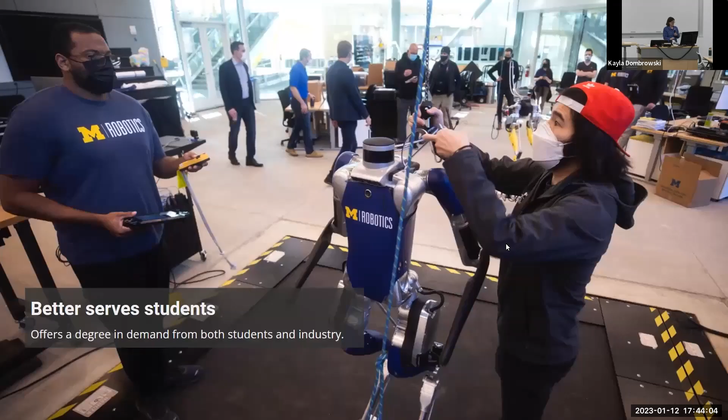We think that a robotics undergraduate program is the right way to get undergraduate students into robotics. If you'd asked people five years ago what's the best way to be a roboticist from an undergraduate perspective, they might have told you to quadruple major in mechanical, electrical, computer science, and mathematics, and while you're at it, minor in psychology. Now, we are not going to put you through that many classes, but we're going to take the pieces of all those majors that relate to robotics and put them together into an undergraduate program to get you ready for careers in robotics or for graduate school in robotics.

When we started the robotics graduate program and the institute, we were working with voluntary service from the faculty. The faculty didn't belong to the Robotics Institute—they belonged to mechanical engineering, electrical engineering, computer science, etc. Now that they've moved to the robotics department, offering robotics courses is their full-time job, not something they're doing on top of other things. Serving on the robotics undergraduate committee is their full-time job, not their part-time job. We think it's better for the faculty to really be engaged in the department, and this will give us the opportunity to ramp up our courses much faster than we could without that department structure.

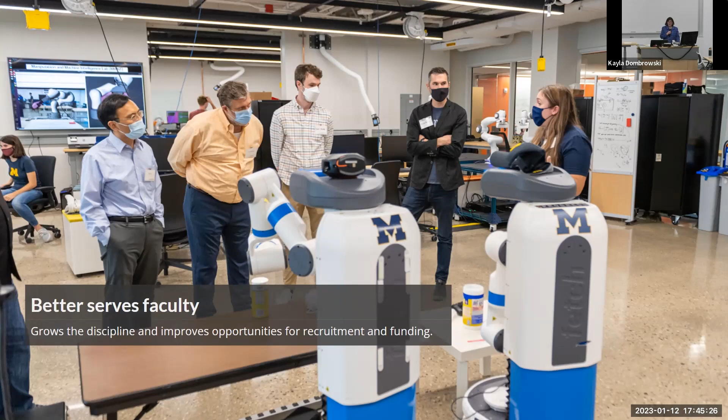You'll hear a lot more about how we're innovating in our undergraduate program. The first thing is we turned the curriculum upside down, and we have you start with linear algebra instead of calculus. We've been co-teaching that course with other schools around the country, including some that are historically Black colleges and universities, creating an environment for our undergraduates built on partnership and collaboration.

We want to infuse those values of diversity, equity, and inclusion throughout our department in the undergraduate and graduate program. We want you to work together with other students, with help from the graduate students, the instructional aides, and the faculty, so that everyone can be successful. All the students admitted to Michigan are super smart and inherently capable of succeeding. We are not building any kind of weed-out program—we are building a collaborative success program.

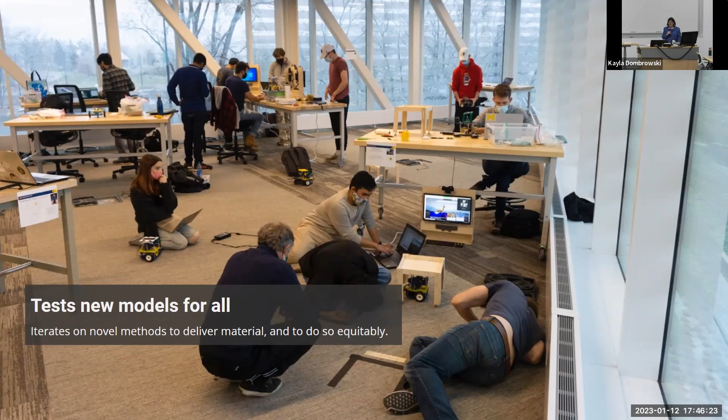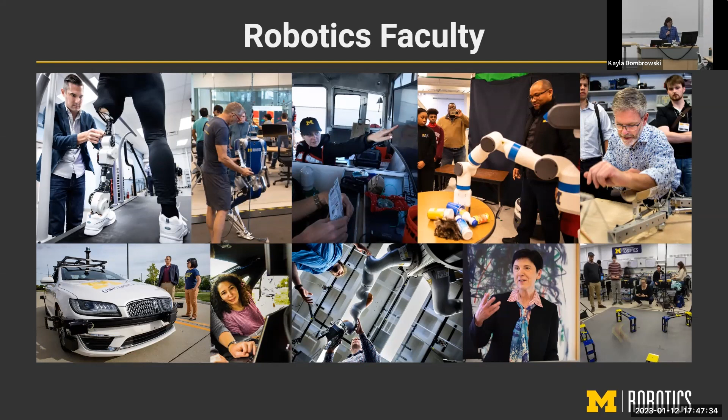I mentioned we'd like to try to define the discipline of robotics. So this is our definition that we're working from: the study of embodied intelligence. That body is really important—this is not just artificial intelligence. This is artificial intelligence embedded in a physical system that can sense its environment and interact with its environment, including people. Even autonomous vehicles need to be given directions and goals from people. They don't do their own thing, at least not yet.

We also have a set of values in the department that I hope you will all embrace. The first is robotics with respect. We expect all members of the department to treat everybody with the utmost respect—other students, teammates, teaching staff, technical staff, cleaning staff, random visitors to the department. We get a lot of those—everybody.

The second is enthusiastic outreach. Robotics is fun, it's exciting, and it's a great way to get young people excited about math and science. We do a lot of outreach activities to get kids excited about robotics, math, science, and engineering, and you will have opportunities to participate in some of those programs, I hope.

Finally, integrity in action. If robots are really going to serve society, if the self-driving car can get your grandmother to her doctor's appointment, we need to design and build these systems with integrity at the very forefront. We expect our community to be honest about what their devices can do and what their limitations are, because let's be frank, no robotic solution we come up with is going to solve all problems. There's always going to be some limitations. We want to celebrate the amazing things our robots can do and acknowledge the things that are still open problems to be solved.

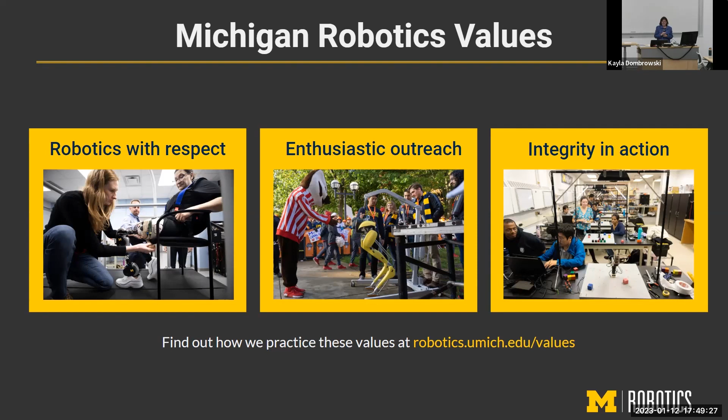Maybe this is why you're here. Many of you participated in FIRST Robotics or VEX Robotics while you were in high school. Michigan in particular is a super hot state for FIRST, with more teams than any other state. It's fun and exciting, and we want to build on that experience and teach students the fundamentals of robotics so they can go to the next level in their undergraduate program or in graduate school.

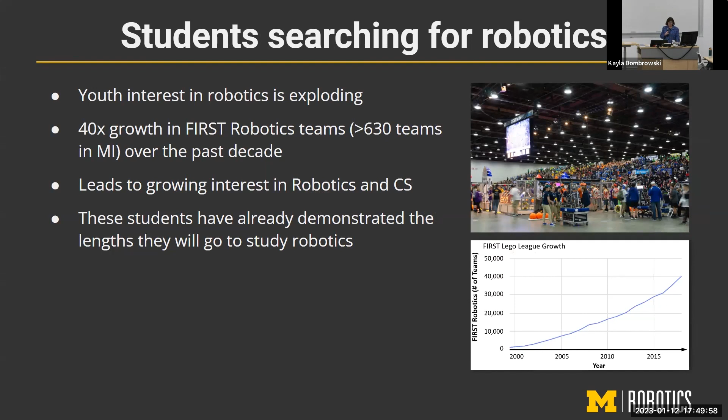Robotics is super hot in the job market as well. Our master's graduates have had no trouble finding very well-paying jobs, doing very interesting things in industry, and we expect very similar outcomes for our undergraduate students.

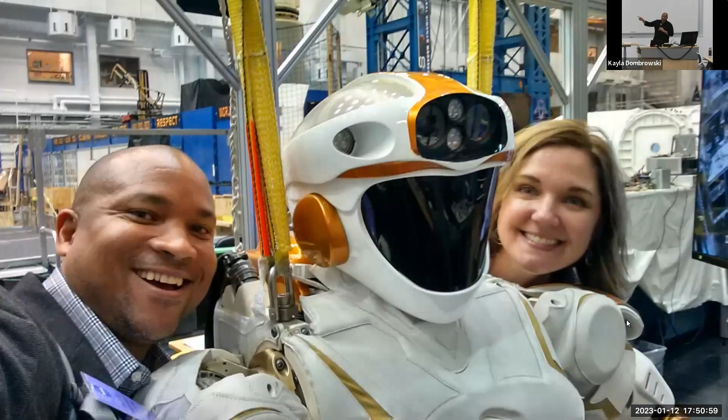I would just like to first start off by showing me and Kim right here. That's Kim Hambuchen at NASA. Kim and I—it's an interesting fact—we were born the same year. We both got our PhDs in the same year, and we've had the same opportunities. We're both roboticists. She works at NASA Johnson Space Center with the Valkyrie robot right here. So for you, you have more opportunity than we had moving forward.

Now just as a quiz—you can't be in this classroom without at least one quiz. Before 2022, when Kim and I were students, what was the best major to become a roboticist? Any guesses? Yeah, Justin. Electrical engineering.

All right, maybe that was the best major. Mechanical engineering. Ellie, yeah, computer science. Any other guesses? What was the best major? Computer engineering. Now I have to say, computer engineering is very close to what we do. There's a lot of great computer engineers that come into robotics.

If you remember what my colleague Professor Tilbury said, the best major was actually a quadruple major in math, CS, electrical, mechanical, with a minor in psychology. So that's really too much to pack into four years.

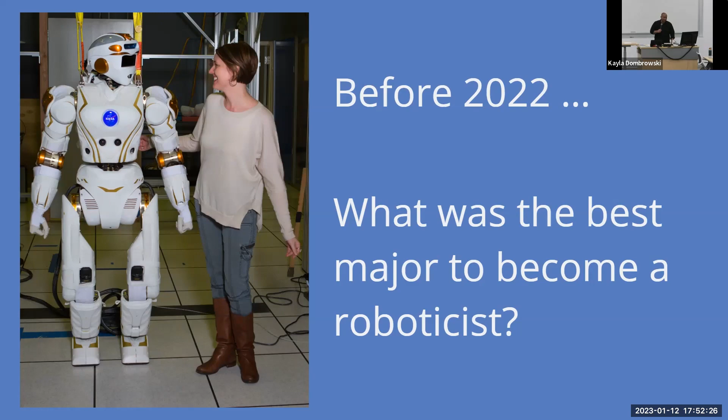We're really trying to give you continued growth into the field. One thing we've also seen is so much energy for robotics on campus, such as through FIRST. Last Saturday was the launch of FIRST Robotics, the competition. We saw people from all over come, a bunch of high school seniors and juniors looking to do robotics at the next level. We want to inspire them from day one, create new opportunities for them, and also create a great, active community for engagement and learning.

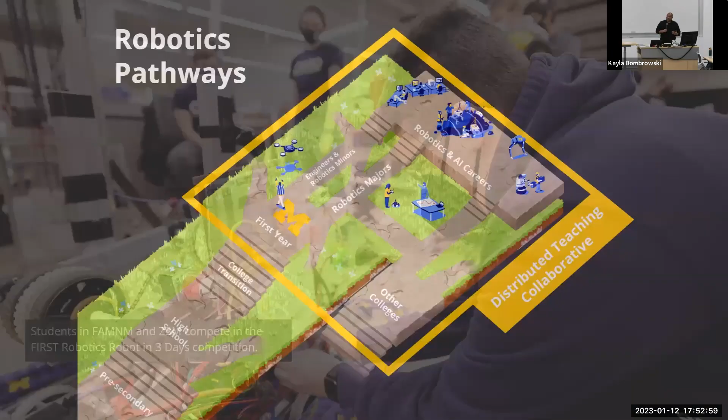We're not just thinking about what's happening in the context of the department, or what this looks like for just the environment on campus, but what it looks like for your entire career. What does it take to work with our partners at the K through 12 level, at the elementary and secondary schools, so that students are ready to have a great experience here in the campus environment? And once you're here in our undergraduate and graduate programs, how can we help you have sustained success in the robotics and AI workforce and be the innovators and leaders of our field?

With that, we've created a first-of-its-kind undergraduate degree program. We've really had three pillars that build on the values that were stated, that we want to define the discipline of robotics. What does it mean to be a roboticist? When somebody hires a roboticist, what do you really get? What we're seeing is lots of demand for that. We want to be able to innovate for equity and improve the productivity and quality of life of people across society, and meet the emerging needs that we're seeing in society.

You should note the robotics program didn't just show up. You're building on a long history that comes from the Computer Information and Control Engineering graduate program back in the 1960s, and even before that. We've seen the launch of the robotics graduate program in 2014, and we're building on that success in order to offer a lot of those same access points into robotics to our undergraduates now.

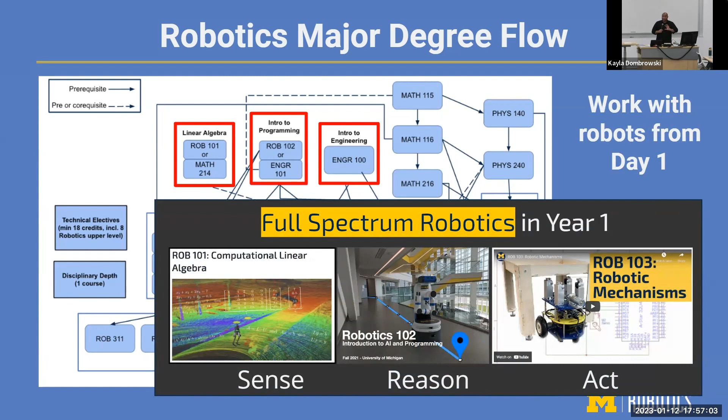Some highlights: in our first year, as Professor Tilbury was saying, we cover full spectrum robotics. How can robots sense the world using linear algebra as the mathematical foundation? How can your robot plan and reason to make actions in that world? That's through introductory programming, covered in Robotics 102. And with Professor Yeo, you learn how to build robots and have them move around in the real world and take actions—that's Robotics 103, or you can take it as ENGR 100 850. This gives you the opportunity to work with robots from day one.

Our gateway into the major is the Human Robot Systems course. One way to think of this is: how can you work with people to design robots for people? You'll develop technical capability, but you'll spend much of your time communicating with people in a team and understanding what you're trying to build. This is Robotics 204.

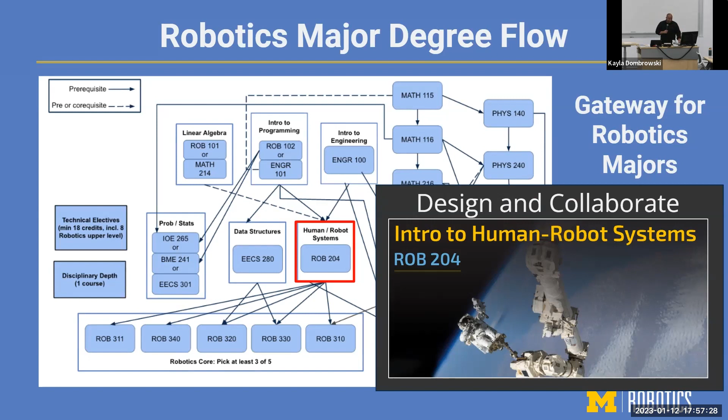In addition, there are other 200 level courses we build from across the college that cover data structures for computing, probability—since our robots have to understand the mathematics for an uncertain world—electronics, so we can wire up robots and have them function, and mechanics, so you can model and control them effectively.

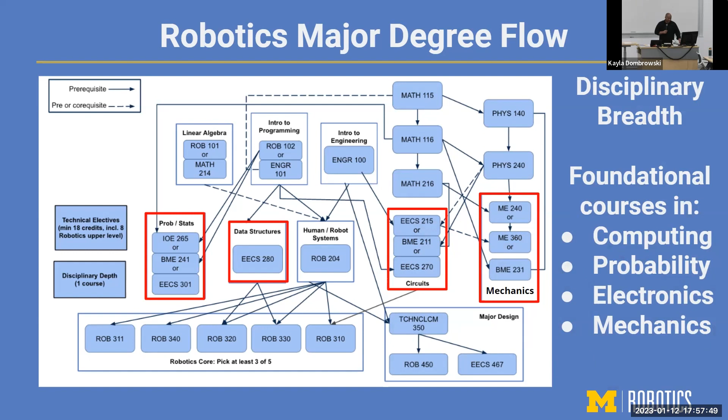From those 200 level courses, we build out into our 300 level courses, where we cover a spectrum of different approaches and topics needed to be a successful roboticist: robot design and hardware, the circuits of the robots, kinematics and planning, autonomous navigation and perception, as well as robots helping people through human-robot interaction. These are pictures from a few of those classes.

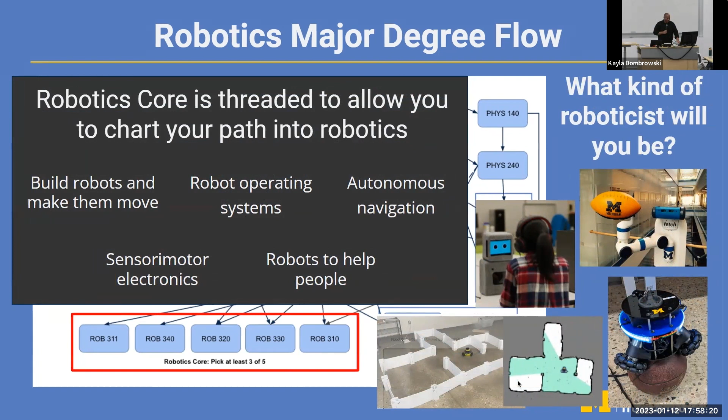Since you only have to take 3 out of 5 of those courses, they help enumerate and define what your path could be. You'll notice in our program guide we don't just have one sample schedule—we have 4 sample schedules you can look at as ideas for what your path could look like, enumerating different threads through our program.

You could be more empirically focused on human-robot interaction, studying how robots work with people—there's a pathway for that. You could focus on the autonomy of robots and computational elements—there's a pathway for that. You can focus on robot hardware, design, and building actual robots—there's a pathway for that. And if you want to take all 5 of our 300 level courses, that's the pathway for being a well-rounded roboticist. So you can choose your own adventure with this.

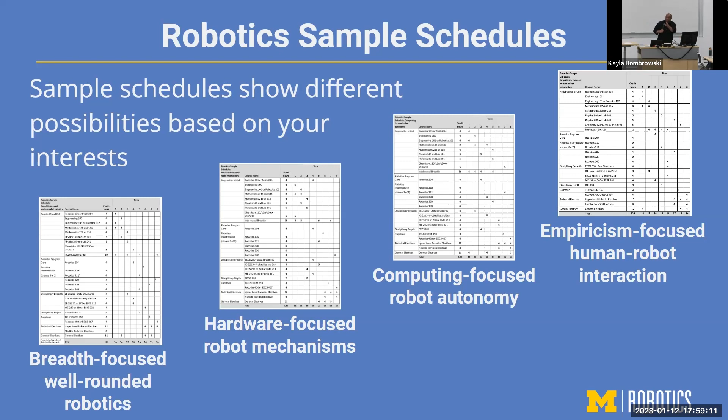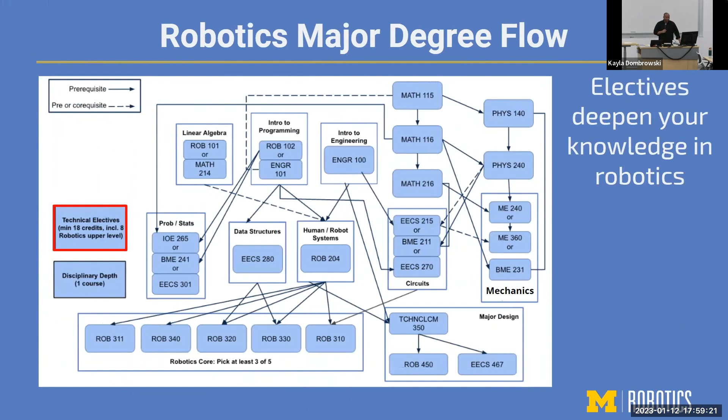We're building out a number of electives at the 400 level, the upper level, that would allow you to deepen your knowledge in robotics. These build on our focus areas. If you look on our website, we cover topics such as perception and manipulation, robot swarms, and bipedal locomotion.

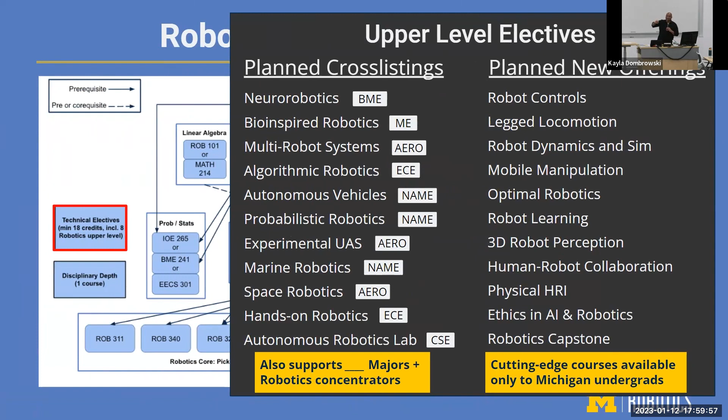We're still going through the design of the upper level, so we're offering some courses. I think I see at least two students here who will graduate with Robotics Majors this year. They're finding their way through, but for students coming next year we'll have more of these courses in place. This is just a listing that gives you a sense of what's coming.

At the end of it, what we're going to have is a capstone experience. This is where you take everything you've learned through the program and go through a two-semester capstone sequence to help you solve a real world problem. What we have you doing is taking TechCom 350 to start off, so you can study a simple problem but understand the design process and how to work with clients to solve a real world problem. Then you'll take that knowledge into Robotics 450.

Professor Kira Barton is slated to teach that. Our initial offering of that will be in winter 2024. There you'll actually work with real clients to solve a problem they have, using all the mastery you've gained in the robotics undergraduate program.

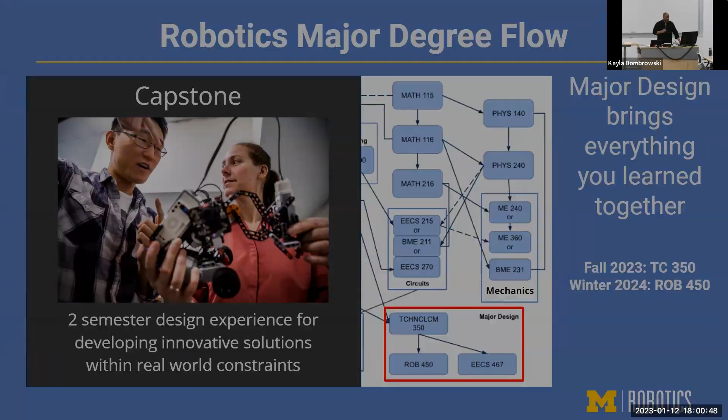We oftentimes get a number of questions — a lot of questions about when we'll offer a robotics minor, a SUGS for a master's degree for robotics, dual degree options, transfer credit options, study abroad, co-op semesters — and that's just a small list. There's actually many. We're still in startup mode, so we're not really addressing most of those, except just recently we anticipate being able to offer a SUGS into robotics for robotics majors for fall. We're still in the early stages of going through the approvals for that, but we're hopeful.

So we're getting to this list. That's a big deal, right, Professor Grizzle? That's a big deal. Did I hear a woo for that? Yay.

All right, I'm not going to say anything about still living in the 90s then.

Anyway, so coming back to: is robotics the right major for you? Should you be thinking about that quadruple major with a minor in psychology? Actually, you don't really have to. The robotics major is really for students who want to do robotics first and foremost from day one — this is their calling. But you don't have to be a robotics major to study robotics.

There are all sorts of other majors. We've been training great roboticists for decades who have come through other programs, so you could do some other major and then do a robotics master's, applying to our robotics master's program — that's a great pathway. You could do some engineering major with a combination of robotics courses. There are a number of concentrations coming up, so you could do a mechanical engineering major with a robotics concentration. I think we'll very soon see other majors with robotics concentrations as well.

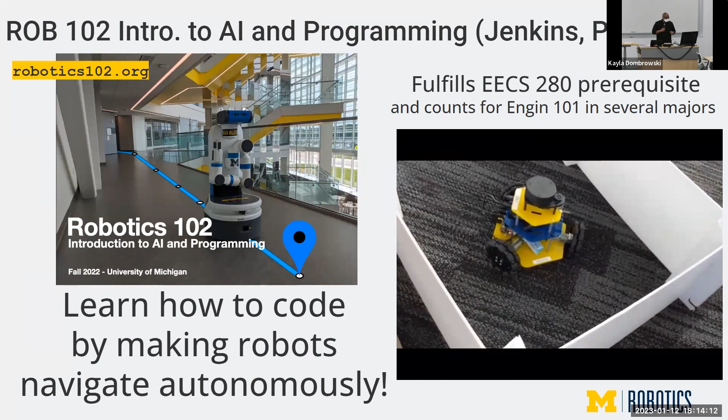And so this course fulfills the prerequisite for EECS 280. So you can take this course and be ready for the first semester data structures course. You learn how to code by making robots navigate autonomously.

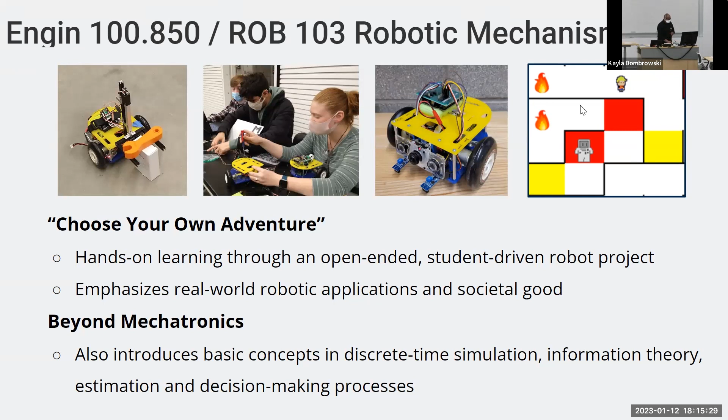All right, next we have Robotics 204. Professor Stirling couldn't be here, but really this course is about - how I like to call it - how do you work with people to develop robots for people? This is identifying how humans describe capabilities and behaviors to inform robotic design. Think about this as a design course. And then really thinking about the human user, how are potential users going to be able to work with this robot, and how do you evaluate that?

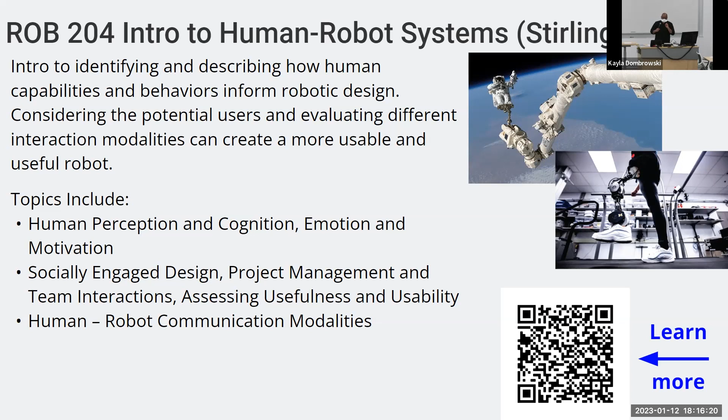There are a number of different topics. I think one thing that Professor Stirling would like to emphasize is socially engaged design, and how we really think about that. This is our gateway course into the major. You have to take 204 before taking the 300 level courses, because we want to make sure that you are a responsible, capable individual that's going to take all the power of robotics and do things the right way. So with that was 204.

And so now we will talk about Robotics 310. Is Peter here? Peter's not here. All right, I'll talk about this course too. Robotics 310 is really our core circuits course. So how do we start to think about analog design and digital design so that you can make robots - so you can do the circuitry that makes robots actually function.

So we study this through how do you develop an inertial measurement unit, how do you build a simple range sensor for a robot, and then also a little bit of filtering. I forgot, so IMU, a range sensor, and then there's one more, an analog to digital converter. Those are the topics so that you're not afraid of making robots. As a computer scientist who's become a roboticist, I'm afraid of touching hardware and soldering things, but you should not feel that way.

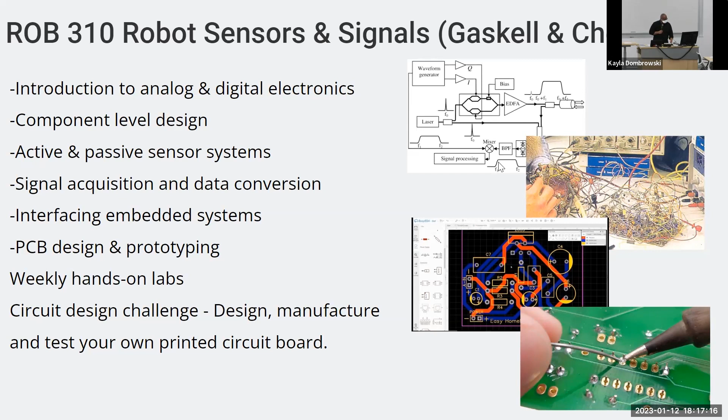So this is the course that really allows us to do this. Okay, I will talk about Robotics 311. Robotics 311 is a build robots and make them move course, so this is really a robot design course. How can you use the shop and all the facilities to be able to design a robot? You use all the machinery there to cut out the robot, assemble the pieces together, and make sure that your design works.

And you explore this all through making a ball bot. So just as I don't watch Star Wars, I have to admit, sorry about that, but apparently a lot of people like Star Wars, and this is sort of like your ball bot from Star Wars. We just ran the first instance of this class, and we have some students who took that class, so it's great to see the demo day and see tons of these robots moving around our building and having a great experience.

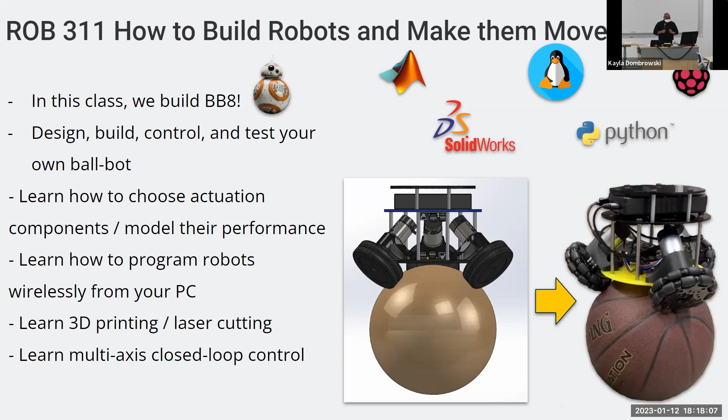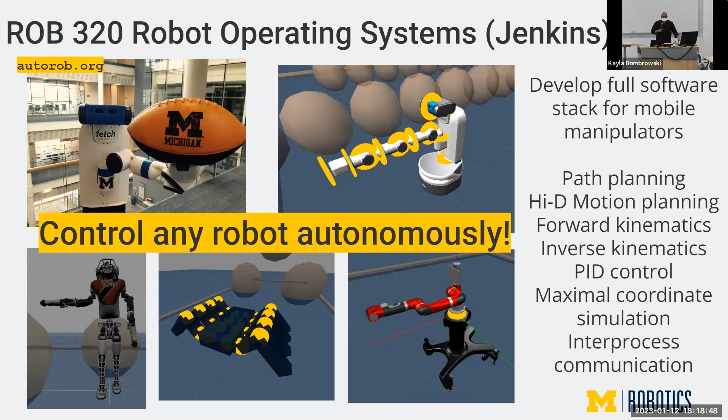All right, one more course. So one course I'm teaching this semester is Robotics 320, which is really a kinematics and planning course. How can we model and control a variety of different robots? How can we go all the way from doing path and motion planning to developing a full stack software system so that you can represent any robot and be able to do pick and place, so the robot can move its end effector, pick something up, and move that object somewhere else. We do this by looking at the systems aspect as well. Students always ask, can I learn ROS, the robot operating system? We will cover that in this topic, which will give us a mechanism to do inter-process communication.

With that, I will pass to Professor Skinner.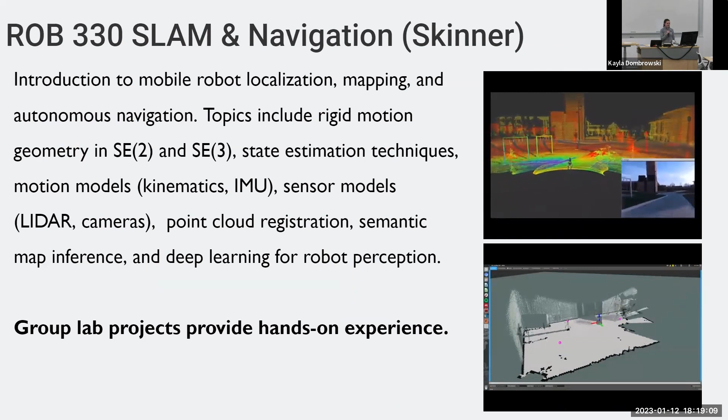Hi, I'm Professor Skinner. I teach Rob 330, our SLAM and navigation course. We just did the pilot course offering this fall, and I see a couple of familiar faces. I feel like next time we can make you describe the course in these lightning rounds. For now, I'll say that this course covers everything robot perception. We cover localization, mapping, and autonomous navigation. We work with a couple of different types of sensors to do state estimation, particle filtering, and occupancy grid mapping. This course is really meant to be a jumping board for going into any area of robot perception you might be interested in, learning a little bit about deep learning, computer vision, and probabilistic robotics as well. Hopefully this is a good foundation for you to go on to any class at a higher level in perception.

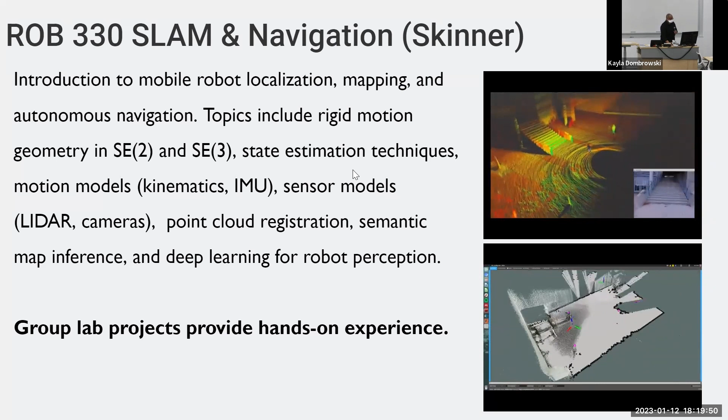Want to say a little bit about 340? Excellent.

Building on 204, the gateway class, human robot interaction is something we're developing, which will handle yet more of how a human interacts with a robot. A human thinks differently than a robot, and sometimes a human can't even describe how or what they're thinking. So you'll be designing experiments to determine what is really going on in their heads, even if they can't tell you. Cognitive mechanisms will be part of the context, the design of experiments to evaluate the performance of both the human and the robot, and the human and robot working together as a team. We'll build on what you've learned in 204 to talk more about behavior, viewed as if it were a human, the robot, or a team again. So measuring human perception, modeling the human operator within the control loop, and other things we'll bring in have to do with the mechanics of interaction between a human and robot when contact is involved, when forces and motions are things you can characterize at that point of contact.

So how is power being exchanged between the two when they're contacting one another? That all falls under the heading of physical human-robot interaction. So both in the physical sense and in the cognitive sense, human-robot interaction contains many subfields, and we'll give you an overview of those.

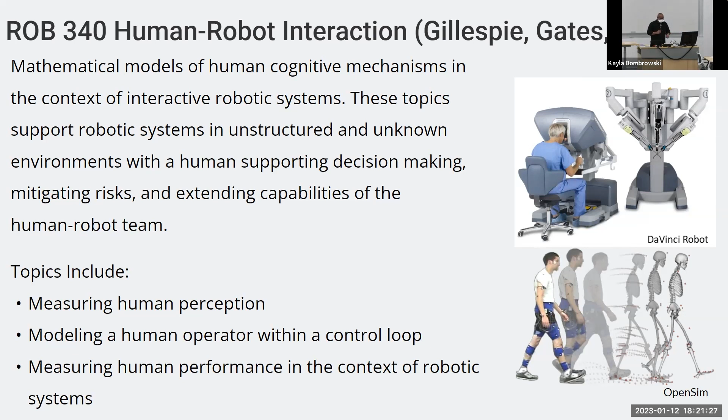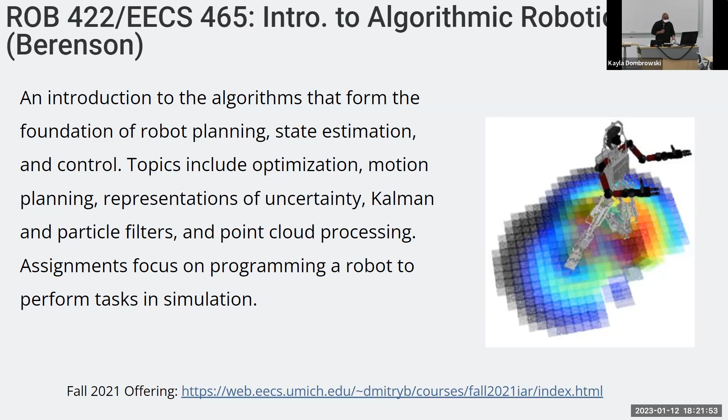Excellent. And so algorithmic robotics, this is a course taught by Professor Berenson. This course covers the wide variety of robotics at a very theoretical level. So it's going to cover things like filtering, path planning, and a bit of optimization. You get a touch on everything in the algorithmic foundations of robotics. So that course is there.

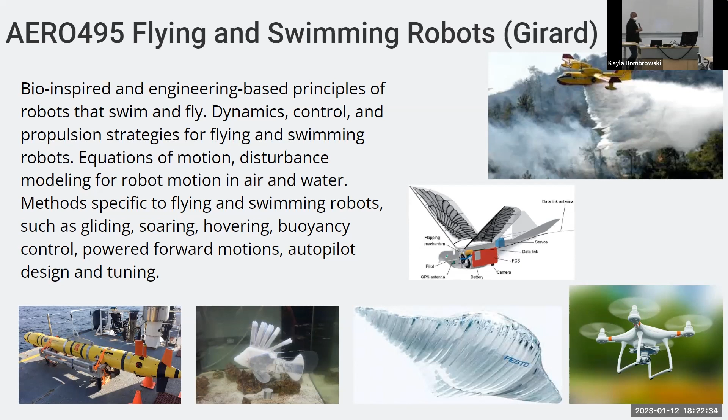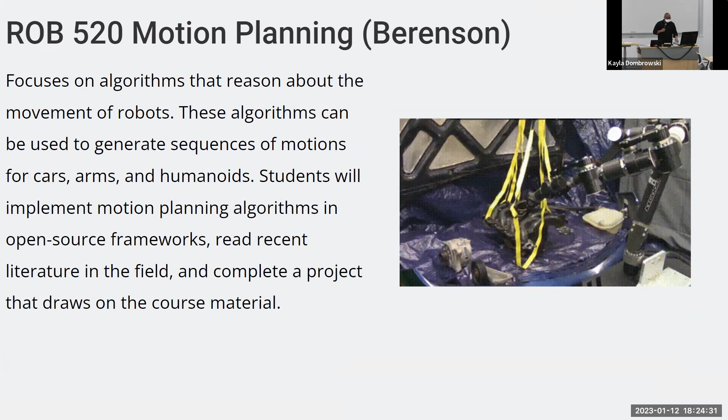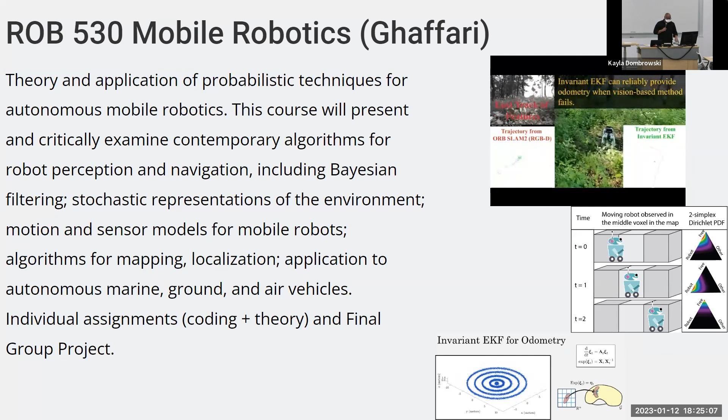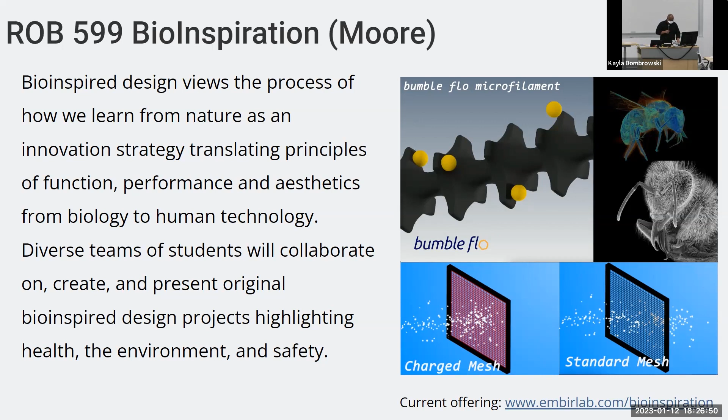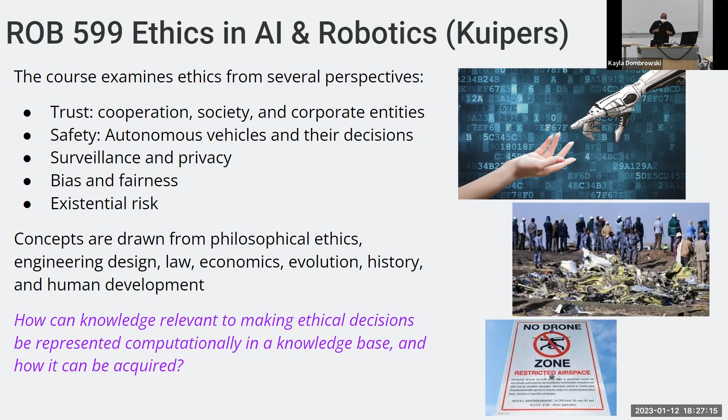There's an ethics and robotics course, ethics and AI and robotics. As we build these machines, what are the ethical considerations for how we use these types of robots and engage with them? They'll think about trust, safety, privacy, bias, fairness, and all of these risks. That course is being offered this semester in the winter, and probably a bit more in a few more semesters after that.

Probably one of the courses that's different than what people are expecting is basically neurorobotics—robots that can be controlled by the brain. This is an interesting approach for decoding signals in the brain and using that to control robots. Sort of like the Luke Skywalker hand in Star Wars, when he has to get it built back—do people remember that, or is that the 70s and people don't remember the 70s? Basically, how can you build brain-controlled robotic prostheses, or use other signals from the body to control robotic prosthetics? This is offered by Professor Chestek in the winter semester.

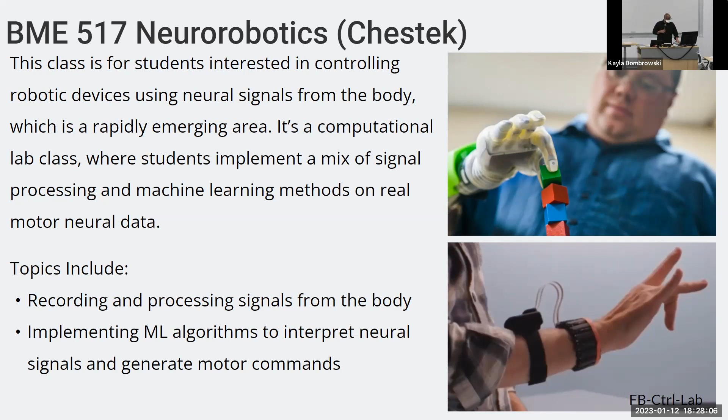I will pass to Professor Skinner, who can talk about 3D perception.

3D robot perception will be a senior level course that builds on what we taught in 330. This course focuses more on 3D perception, expanding to stereo cameras and thinking about how to perceive 3D environments versus the 2D occupancy grid maps we did in 330. If you're interested in the vision aspects of that course, 3D robot perception would be a next step for you.

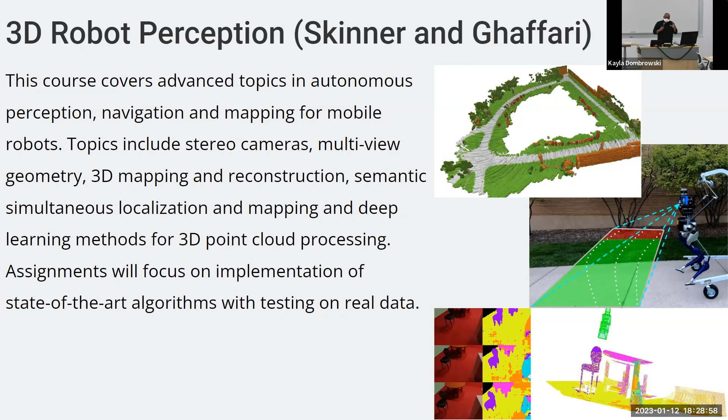Even though I don't work in SLAM—I do work in perception, but not SLAM—I think mapping is one of the coolest things. When students see it, it's just like, oh wow, I didn't realize we could do that. So that's kind of cool.

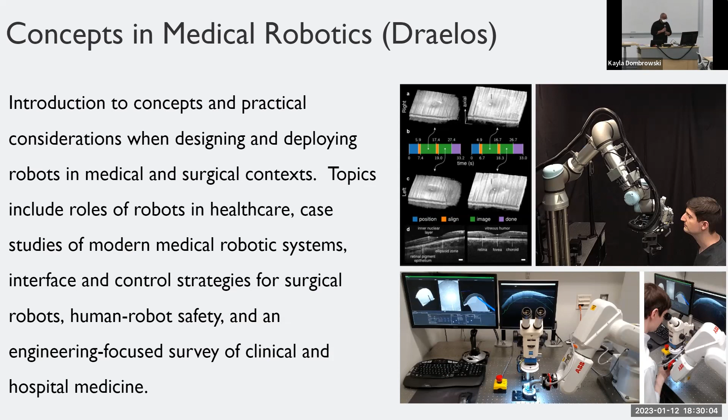It's a special privilege—this is a very new area for us in robotics, so I would try to take advantage of it. I believe there's still time to sign up for your classes, so I would take advantage and join if you can.

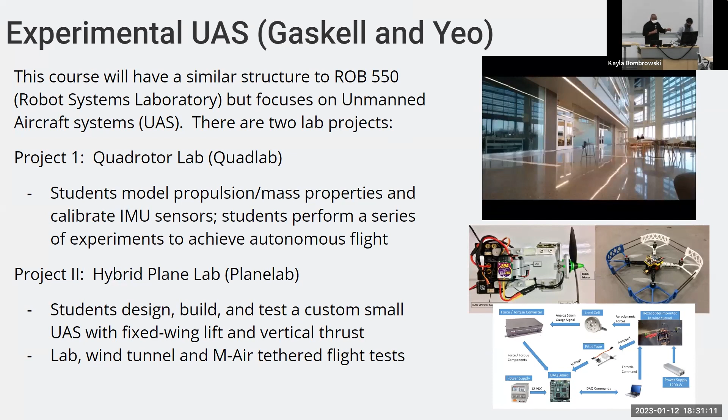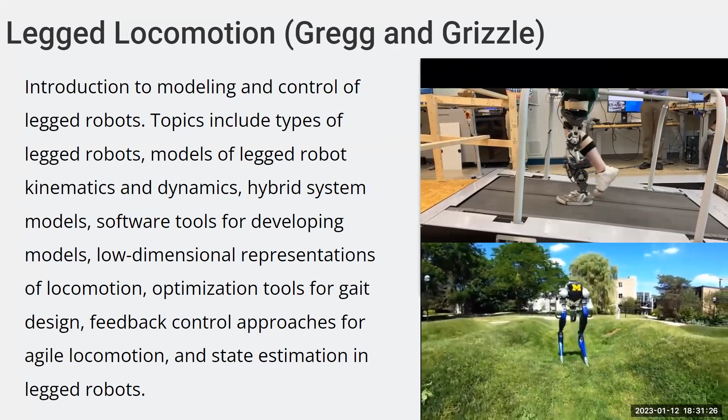Bobby, Professor Gregg, would you like to talk about this course? I defer to Jesse unless he's left. I'm happy to cover it. Go for it. Sorry, who's going for it? All right, you're going to go for it. Bobby, can you go for it? Okay, yes, sorry, Zoom miscommunication here.

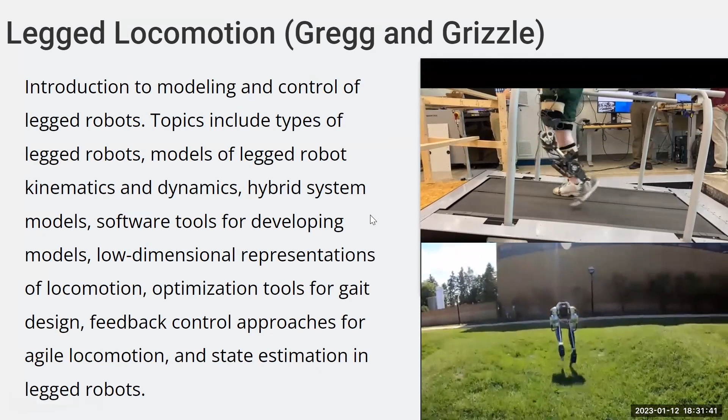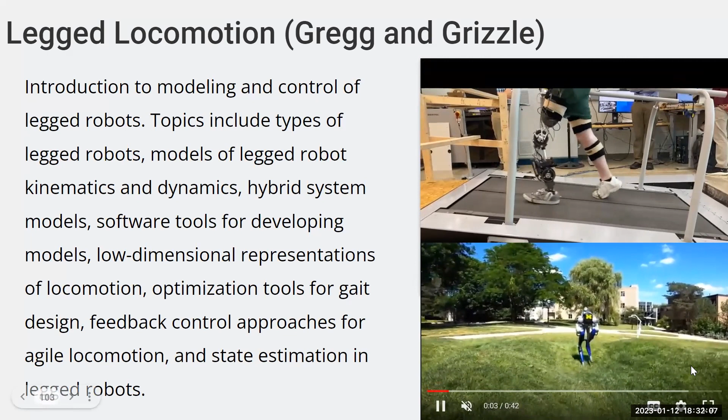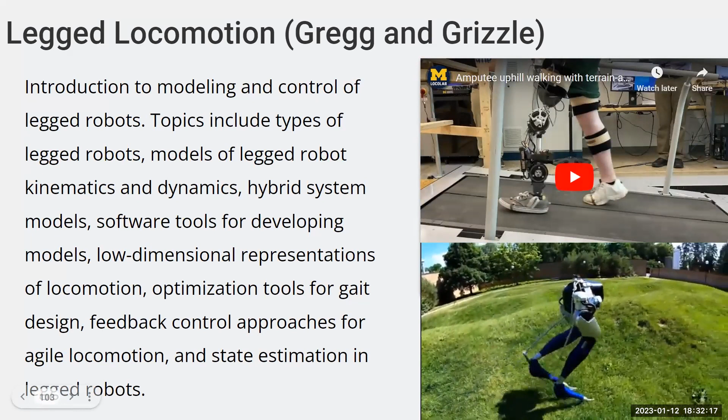So legged locomotion is a new course that Professor Grizzle and I plan to develop soon, covering different types of legged robots, from quadrupeds to human-like bipeds to non-human-like bipeds. Examples include a powered prosthetic leg used by an amputee, and the Cassie robot, which has more bird-like legs than human legs. We'll cover concepts for modeling the kinematics and dynamics of these systems, including hybrid system models involving both continuous and discrete dynamics to deal with foot impacts.

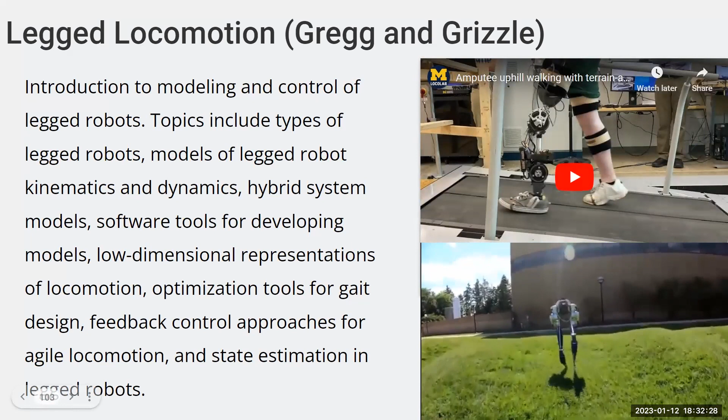We'll also cover software tools for developing these models, optimizing the gaits, and designing control laws that produce stable locomotion with these gaits. So that's a new course we hope to develop over the next couple of years.

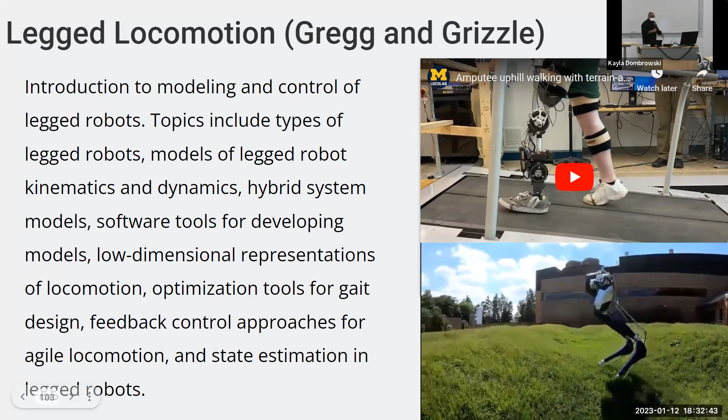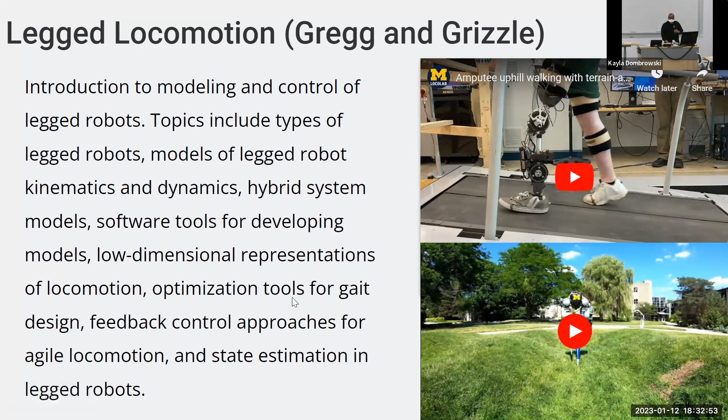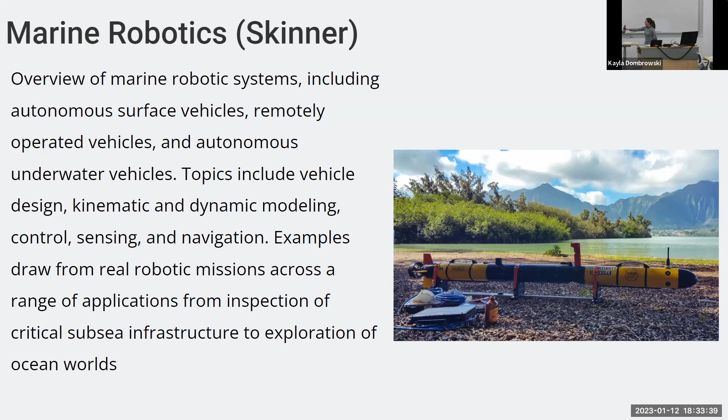This will be a new course that we're hopefully going to roll out either next year or very soon after, hopefully next year.

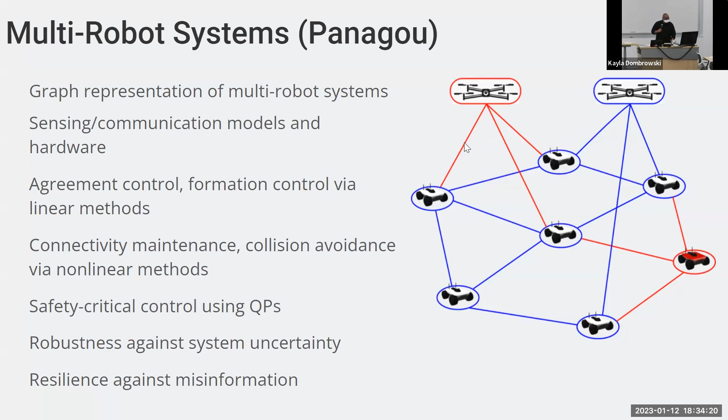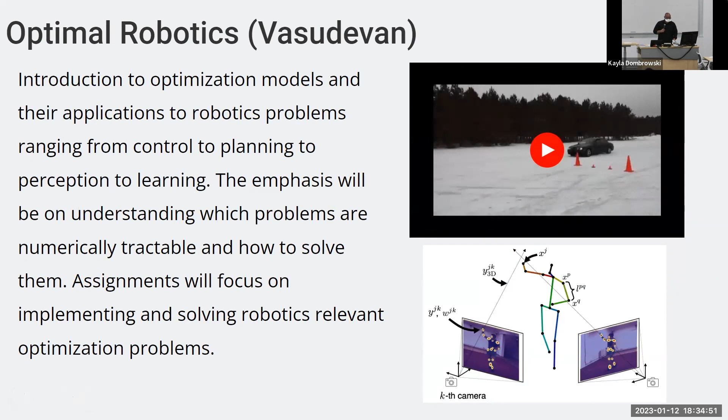There's an optimal robotics course being considered, looking at what optimization methods look like in the context of robotics, for controlling robots such as a car on ice, but also thinking about human motion and being able to estimate it. Optimization is a major tool and source of capability for robotics, so how can we start to think about that in this context? Professor Vasudevan will look at that.

We're also creating a new robotic control course, building off of those ideas, building on a similar idea as well. Professor Gregg, I believe, is going to help us create that course. Bobby, can you say a few words?

This is going to be a new style of controls class, unlike what you might take in mechanical, electrical, or aerospace engineering. We're not going to just start with a whole semester of frequency domain control system design. We'll be dealing with state space models that can handle both linear and nonlinear systems, because robots are highly nonlinear. We'll talk about optimal control for robotic systems, under-actuated robotic systems—meaning robots with more degrees of freedom than actuators, which makes them more difficult to control. We'll also deal with model predictive control methods, as well as elementary nonlinear control methods.

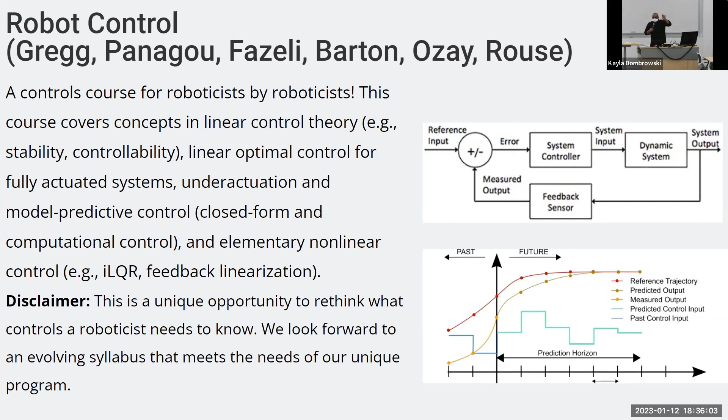All right, thank you very much. Let's thank Professor Gregg. A controls course for roboticists by roboticists—we should keep that in mind.

There's a space robotics course. Professor Girard, you want to talk a little bit about this?

Yeah, sure. The class hasn't been taught yet, so it's not entirely clear what we're going to cover, but space robots excite a lot of imagination in the public, and they're really cool. We'll talk about what makes the space environment special, and why it's interesting and difficult for robots in some ways, and perhaps easier in others. Then we'll talk about different missions, navigation, control, and planning strategies for all the different missions. The goal is to use a different mission every time we offer it, to keep it interesting.

Very cool, very cool. Thank you for the thoughts into the future, Professor Girard. Let's thank Professor Girard real quick.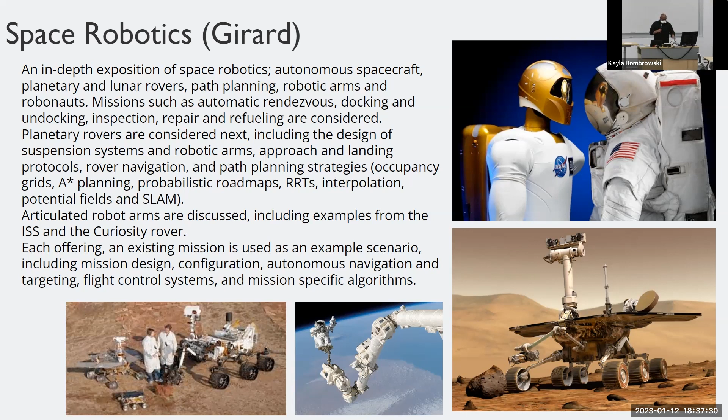All right, let's thank Professor Huang.

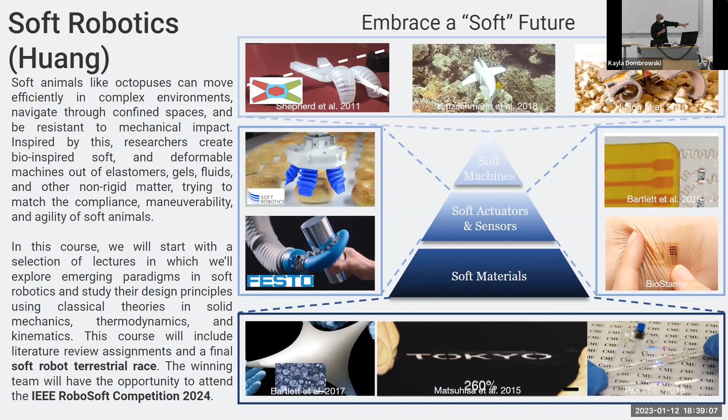I just wanted to emphasize, this is really a very hot area, very new, and we're very fortunate to have Professor Huang here. The types of robots we're thinking about that are typically rigid, we're moving increasingly away from that to something that's compliant and can work with people. So I'd recommend—there are still slots in this class if people want to take it, so people can join in.

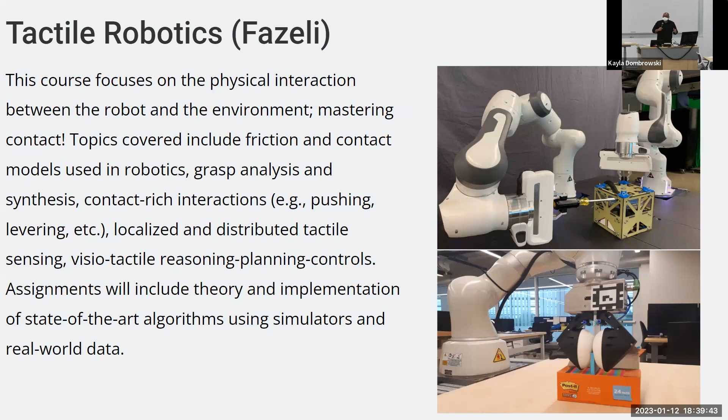And there's also coming up a tactile robotics course. Nima's not online, I'm assuming, so I'll cover it. A lot of times when we think about perception for robotics, we're thinking about it from the camera perspective, some sort of external perceptive device. But the robot can touch things, and as robots are interfacing with or physically touching different objects, how can we think about that as a perception mode that would allow robots to function properly? This is really thinking about contact as an important sensing modality for robots.

So with that, I'd like to thank our faculty one more time. We have an amazing set of courses, so let's give our faculty one more big round of applause. Thank you.